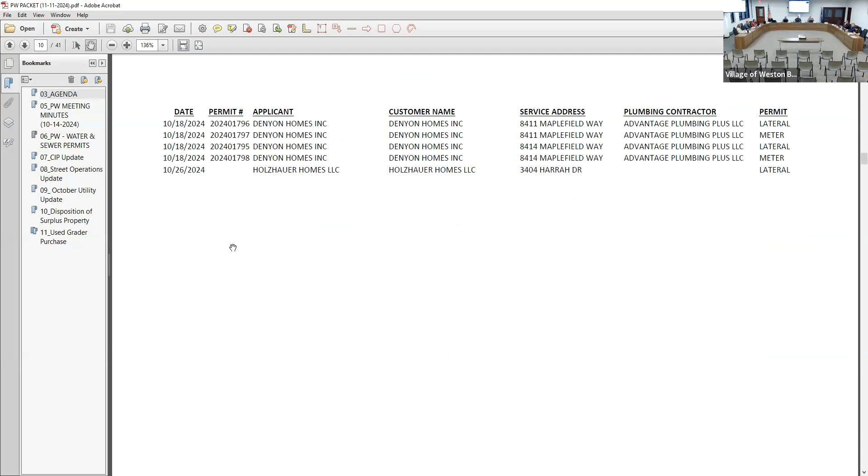Thank you. Item 7, CIP update. Michael?

We do have a new board member with us today too. I think we glossed over that quickly, but we already welcomed him to the board, the big board. Glad to be here. I'm happy he's here, and he wasn't here when I needed him, but that was for both of you. We're gonna be good from here out. Well, welcome to Public Works and Utilities, hopefully enjoy your time here.

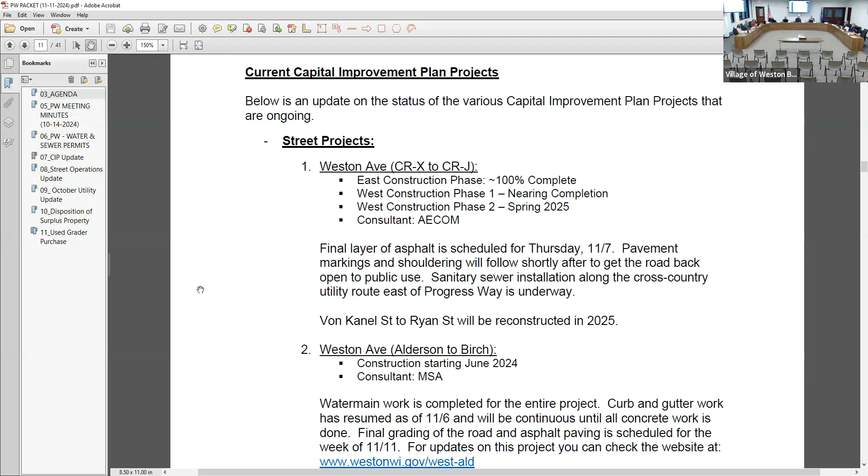As far as our streets, construction luckily a lot of asphalt is gonna be going down this week, so roads should start looking like roads again. On County Highway, or Weston Ave just east of the intersection, the final layer of asphalt was paved last week. Pavement markings and shouldering will happen early this week, and it should hopefully be opened up to traffic by the end of this week. Century Fence is doing the marking, we don't use Marathon County anymore for the contracted projects. Marathon County does the line painting for us as the village as part of our general maintenance, but for larger projects it's up to the contractor to schedule that themselves.

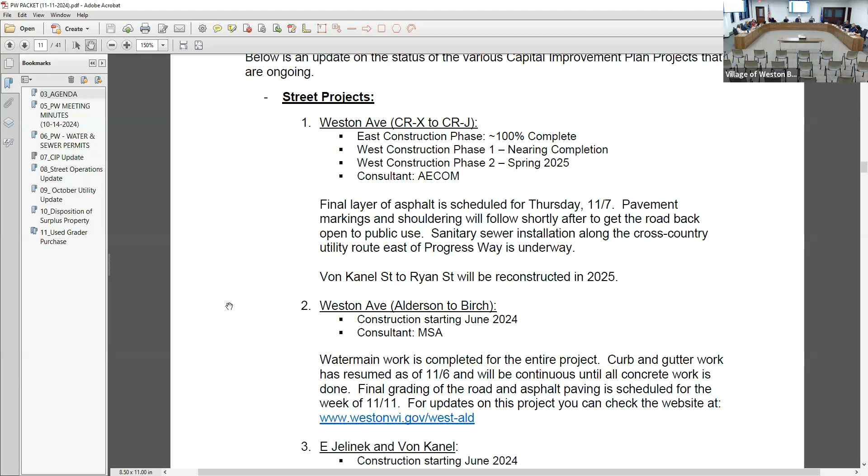So that'll conclude that portion of Weston Ave for this year, and then in the spring Von Kanel to Ryan Street will be underway. Then for Weston Ave between Alderson and Birch Street, the concrete curb and gutter was all finished last week.

Integrity was out doing final grading over the weekend, and paving is scheduled for Wednesday or Thursday this week out there. They'll get binder down on Weston Ave. Their plan, I believe, was to turn around and get surface on the other streets that had binder, and then try to finish up surface on Weston Ave.

That one should be open shortly -- that was my question, when it's gonna be open to traffic. Pavement markings on that one might have to wait until the following week, but we could maybe look at temporary lane delineators just to let it be open, or at least still under a construction zone. And then East Jelinek, if you drove by, got binder down today.

They'll kind of continue that effort throughout the rest of the week. American Asphalt has a fair amount of work to do in the village of Weston, and they'll just be going from one of our projects to another, as long as temperatures stay good, which looks like it'll be okay this week, though it'll get a little close there.

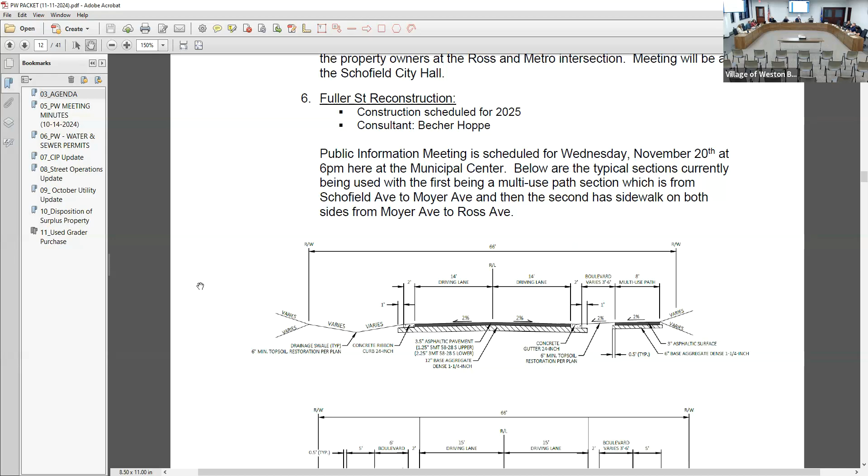And then for Fuller Street, we have a public information meeting scheduled for next week Wednesday here at the Municipal Center. That isn't necessarily something you guys need to attend -- it's not required, but if you want to, you're more than welcome. Essentially, from Moyer Avenue south there'll be a multi-use path on the east side of the road with a ditch on the west side, and then Moyer Avenue up to Ross Avenue would be sidewalk on both sides of the road.

Somewhat similar to Mesker Street, just a few blocks over, but I think the asphalt pavement width is about 2 feet less, while the grass terrace area should be about 2 feet more.

I just have a question on this. I think two meetings ago you said you're going to use the soccer field area for stormwater, and then let them play soccer after the water drains. That's not going to work, because each time you get water in there, there's going to be sediment and fine dust, plus any contaminated pickup like grease or whatever. Those are going to be there, and I don't think they can play.

So there'd still be some pre-treatment, so the hope is to catch a lot of that suspended solids and dust debris prior, and then the pond would be more for the infiltration aspect of it.

Is it even being used anymore for soccer fields? The only organization that uses Kellyland is what Sean refers to as the Home Educators Group, I think it's a homeschool group that uses it in the fall, like one or two days a week. I walk past it a lot and have seen zero people using it all summer. Not one single time have I seen anybody out there playing anything. It doesn't mean I'm walking by there all the time, but yeah, 20 years ago it got used a ton. So it's not a highly reserved field or area.

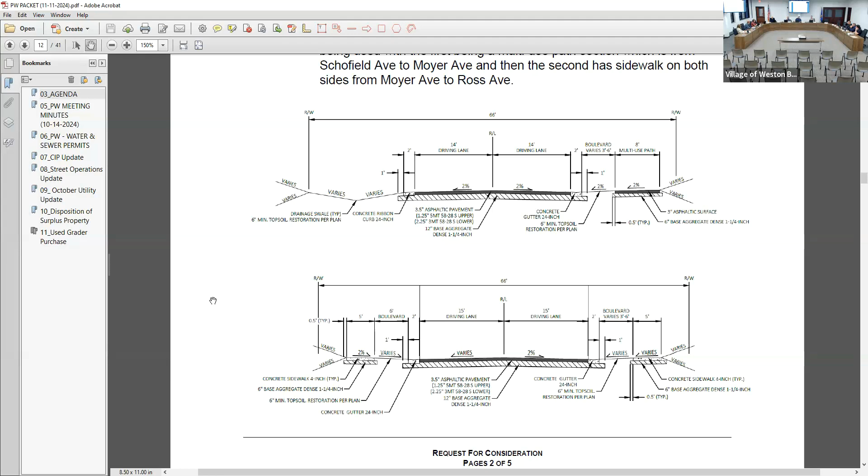I think that was about 4 feet deep, that's what we'd dig out of it to go to the landfill. It does already have that natural depression in it, so.

All right, can we back up for just a second? Ross Avenue, Metro to Pine Street to Alderson Street. Is the city of Schofield doing something west of Metro? They do have another Ross Avenue project, I'm not sure what that all entails. So you're not coordinating with those guys necessarily then?

This one is a joint project with Schofield in that stretch. The north side of Ross Ave is in Schofield and the south side's in Weston. Like Greenheck, the main Greenheck facility there is in Schofield, but their HR building and what used to be the Sugar Shack area, that's Weston.

And then those intersections, like Metro and Pine Street, is a 3/4 Schofield, 1/4 Weston intersection, and Alderson Street is 3/4 Weston, 1/4 Schofield.

So those signs they got in there, did they get approved by the village, or did they not have to? They did get approved, through the Schofield Plan Commission. They knew these projects are in the works, but we're looking at 2027 for construction, so they didn't necessarily want to wait until then to get their signage up.

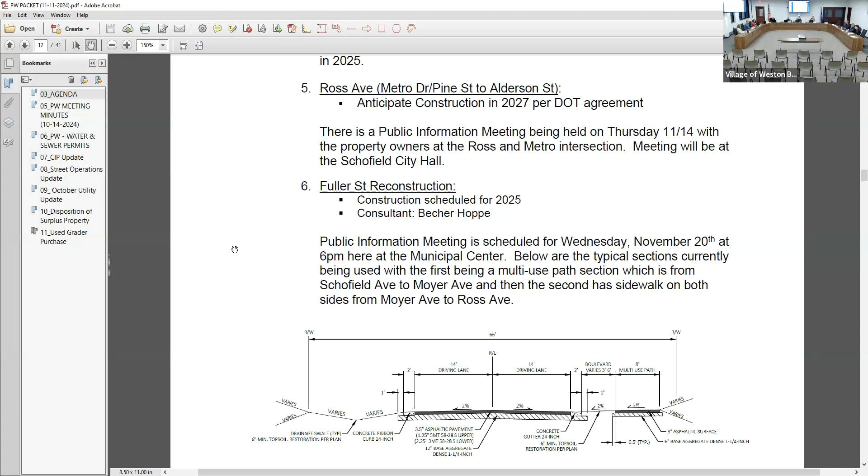That one also has a public information meeting this coming Thursday at the city of Schofield, essentially just looking at that Metro Drive intersection, trying to get a better understanding from those property owners how to best align a roundabout within that corridor. Some options get it really close to a house, some keep it fairly far away, so just trying to understand what is or is not acceptable to those property owners.

And then the other one still under construction right now is the Schofield Ave and Mesker Street project. They worked on some of the concrete pavement repairs last week, and I think all those are done now. Curb and inlet work on the inside islands, as well as getting those bases poured, will happen this week. I think a frontier hole and hand hole still need to be relocated, so the sidewalk work on the north side can get finished up there.

But for the most part, they should be able to get the traffic lanes back up, hopefully by the end of the week for through traffic as it was. And then the signals are still looking like about the second week of December to be getting installed.

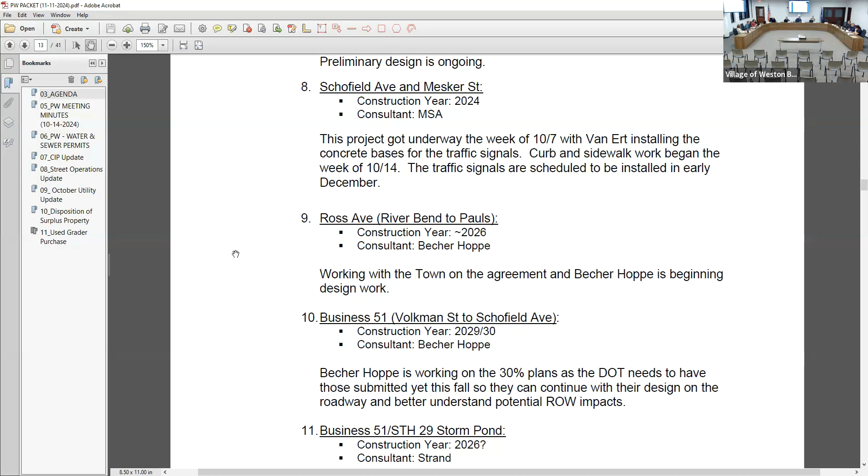Can we go back to Fuller? Sure, in cross section, one of them has a 14 foot driving lane and the other one has 15 feet. Are we putting a bicycle path in there or what?

I guess we'd be making it all 14 feet, looking back at it. These aren't final, these are kind of where we're at right now. Late last week and even today I was going over some of these details with Becher Hoppe a little more diligently.

So we'd try to get a little wider boulevard or terrace area there. One of the complaints we get is, especially come snow season, if you've got sidewalk outside your house, a wider boulevard gives you more room to shovel snow, and you're not fighting all the snow from the street that got plowed onto the sidewalk. The more room we can give people on the boulevard, the better, and it also creates greater separation from the traffic as you're walking.

In a 14-foot lane, you can still get a 10 or 11-foot drive lane and still have a 3 to 4 foot bike lane striped. You do need a bike lane there because it takes a lot of traffic. Yeah, they come off of Ross and turn that way.

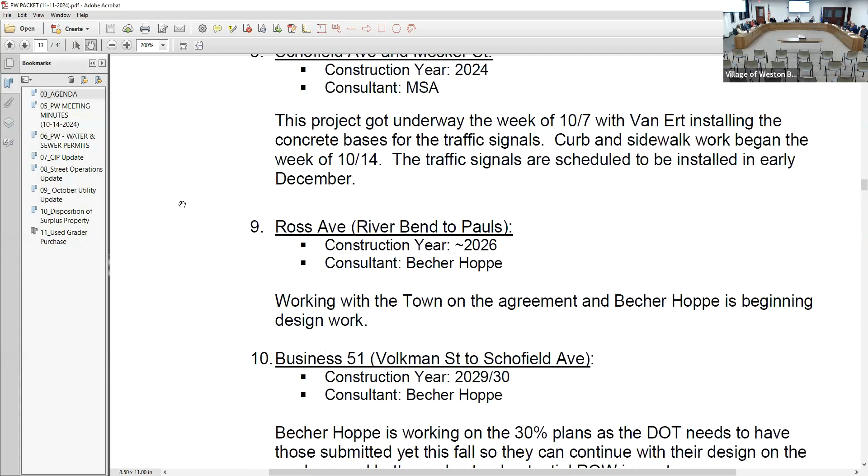So you're going to bring back another cross section. Yeah, that's still, like I said, preliminary design aspect, we're not final yet. All right, I guess that's probably the main items going on at the moment.

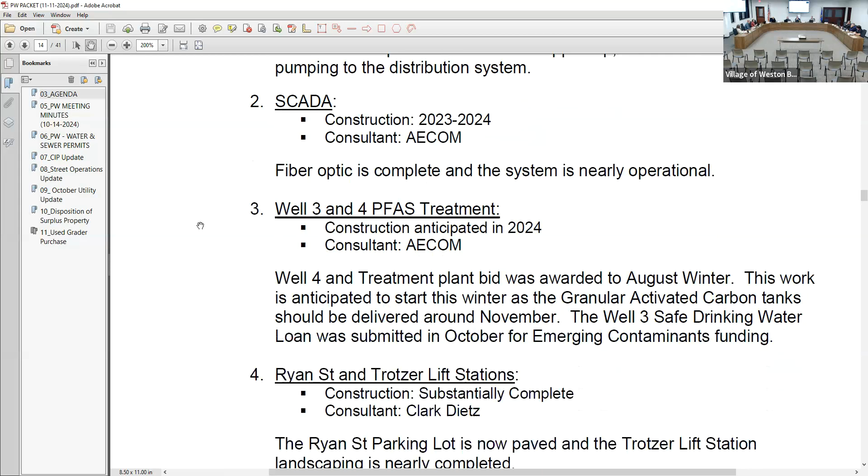And we still have a bunch of other projects in planning and design phase. I can let somebody else talk for a little bit, unless you have questions on anything else we have going on right now.

Maybe sometime we should look at the Alderson and Ross Avenue intersection, by Greenheck and Crystal Finishing. As far as, you want to see the conceptual layout there? Probably. Okay, yep, can do that.

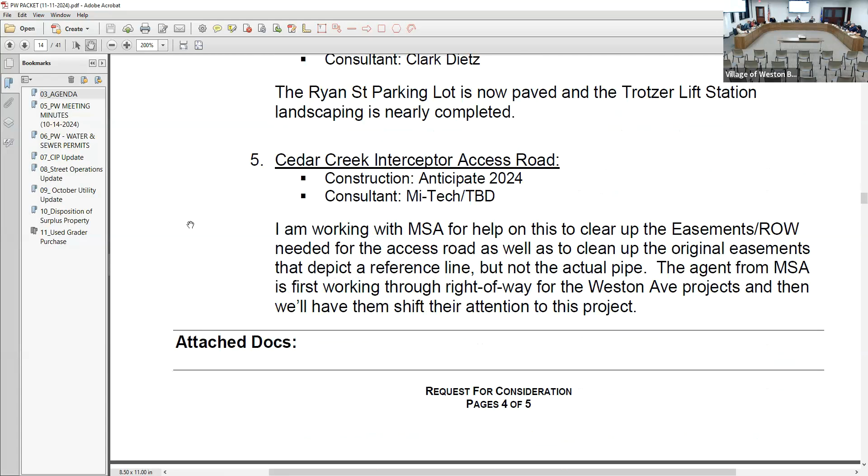That one has a little less... I could even send you guys that, or bring it to the next meeting. For the most part, that property on the southeast, it'll eat into a little bit of that woods, but trying to fit a roundabout in there, the Greenheck building on the northwest corner is kind of a constraint, we can't build into it, so that's kind of the holding grade there. So a lot of the impact at that intersection is on the southeast corner.

Yeah, you've got truck traffic too. Yep. All right, anything else?

Question for Michael, real quick, with the East Jelinek project, is the multi-use path being paved at the same time as the road, or has that kind of been put on the back burner? No, they'll get paved, I think, with the surface layer. Oh, so probably after binder, before final.

Yeah, because they paved the one on Von Kennel north of Jelinek after binder, so yeah. That one's in the mix too, somewhere in that fold of American Asphalt paving something in the village this week and early next week.

Maybe we should look at Ross Avenue, not in the future sometime, and look at the right of way. See if we can solve the issue in there, or solve it because of a Kelly bar. He's sitting on the right of way practically.

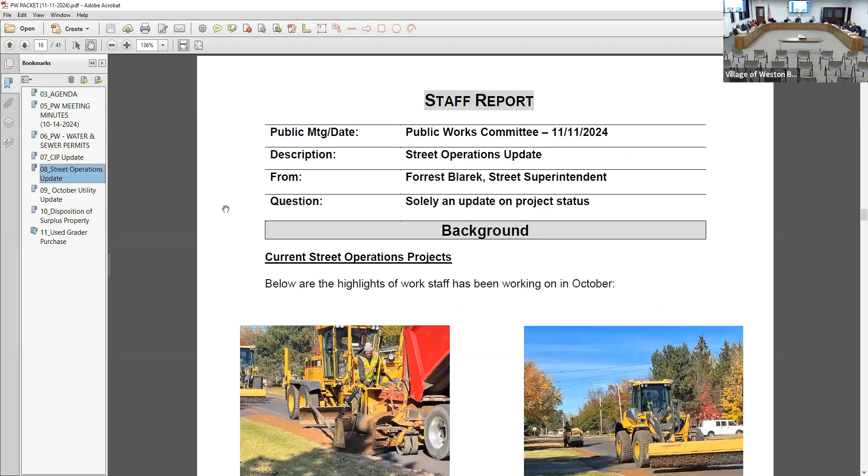Anything else, Michael? Item 8, the street operation update. Yes, as of last month, our shouldering operations got done where we had all the overlays take place.

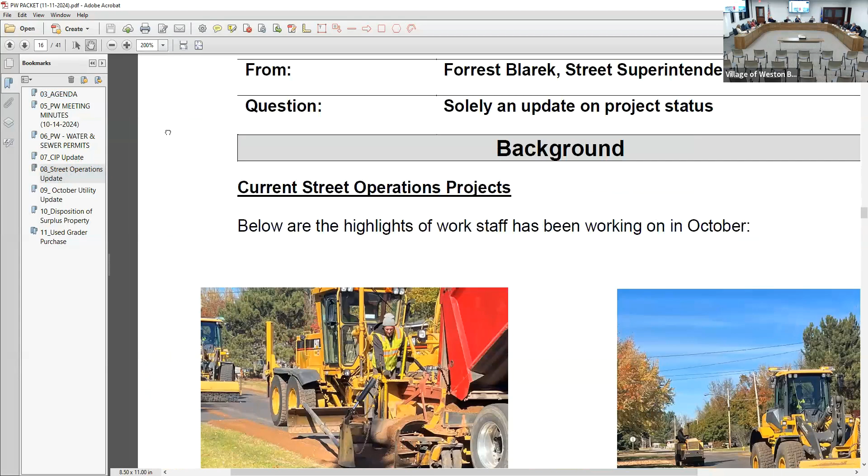Staff performed all the shouldering of the granite, which included the Mallet Court, Chadwick, Colleen, Conless, Parkway, Country Creek, Siberian, Sandy Meadow area. We got that accomplished. We had to wait till a little bit later in the month due to the warm temperatures.

With that being an inch overlay only, we can't twist and turn on it with the heavy equipment, otherwise it mars the blacktop pretty good. So we had to wait for a little bit cooler temperature. That's what took so long to get that done.

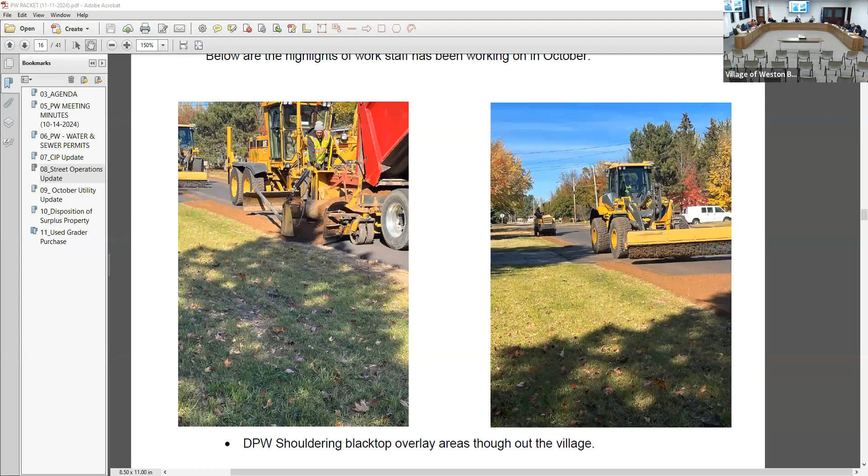Still got the ongoing leaf pickup, leaf brush pickup. We are behind by about 2 days on our vacking of the leaf piles. That has been running a little bit longer on days since we got the rain.

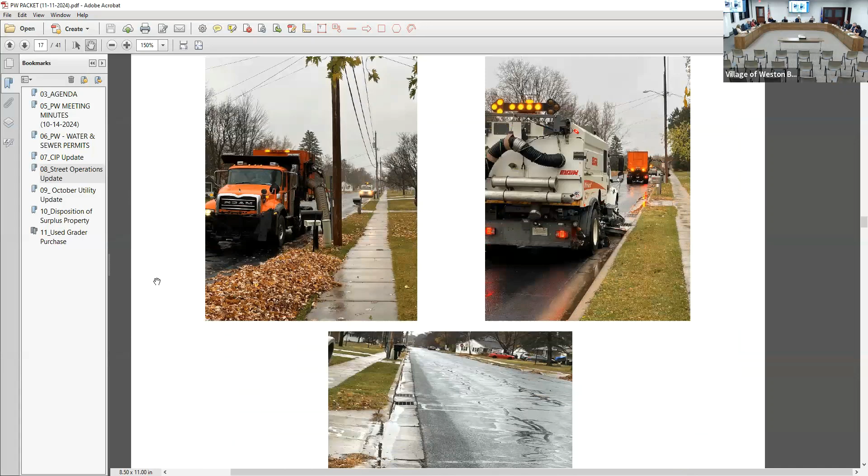They did put in a couple extra hours here and there finishing up the street so they can advance to the next route faster. We're utilizing dump areas such as Kennedy Park and Machmueller for the vacs to dump off so they can get back on route quicker instead of having to run all the way to Ryan Street to dump. They can dump at those sites, which we can clear out on later dates and times.

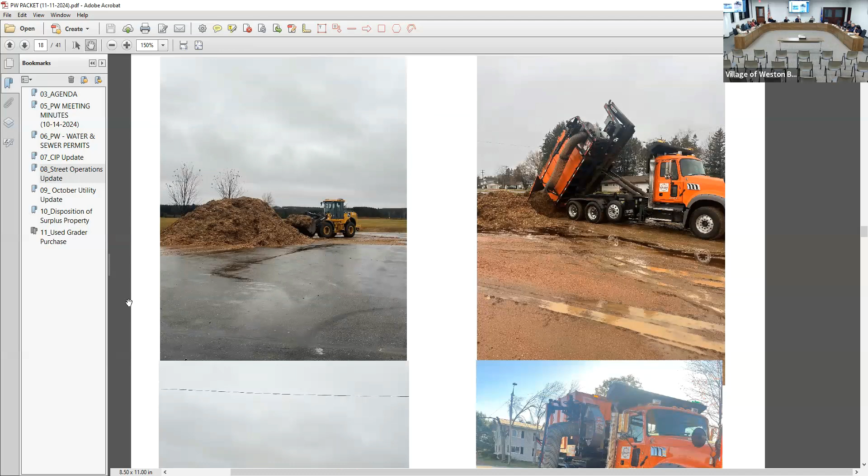The brush goes directly to Ryan Street after being picked, because the brush turnaround isn't as much as the leaf grass pickup. Keep them on the time schedule. Also down at Ryan Street.

They're taking care of the brush and the grass compost down there. We are also taking staff down there about 2 days a week to clean everything up, keep everything organized, sometimes more, especially with the contractors coming in and out, hauling material.

We had an instance with like a dirty blacktop type coming in with sod and dirt mixed in with it. We had to separate it from the pile to be crushed.

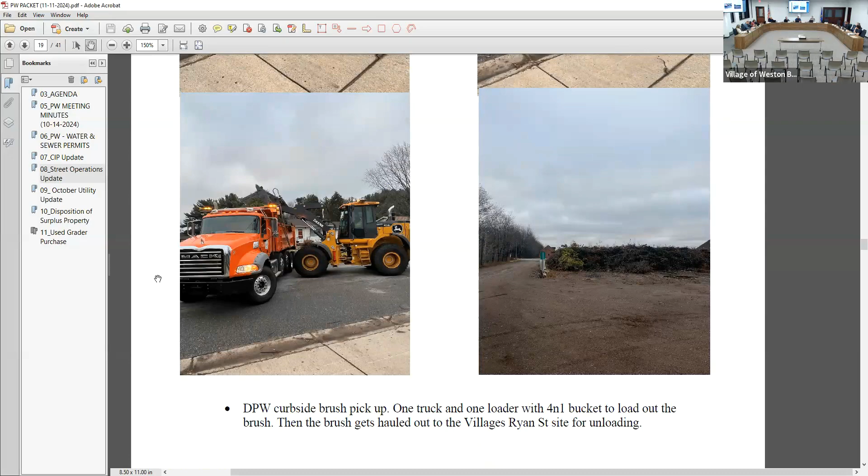We had concrete work around the hospital done that the staff had done. We had inlet failure going on up there, and noticed some cracking of the concrete sidewalk.

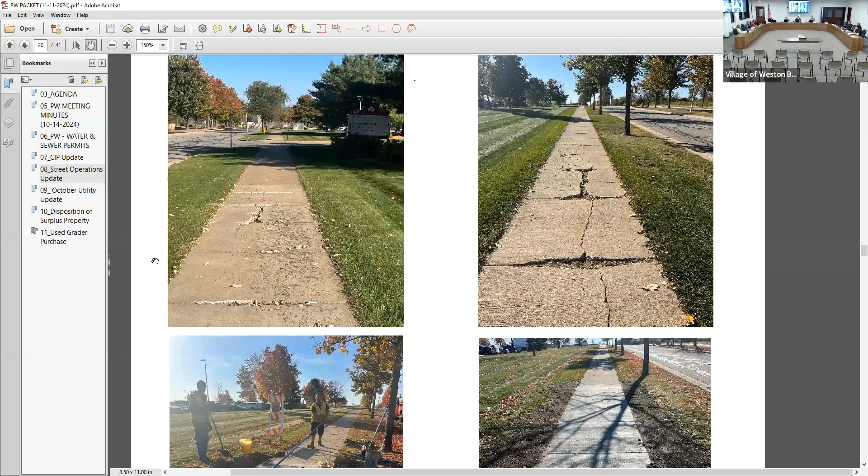To get the 3 yard minimum, you gotta order 3 yards per truck, otherwise you get charged for 3 even if you don't use 3. So we fixed the inlet and did sidewalk repair with that.

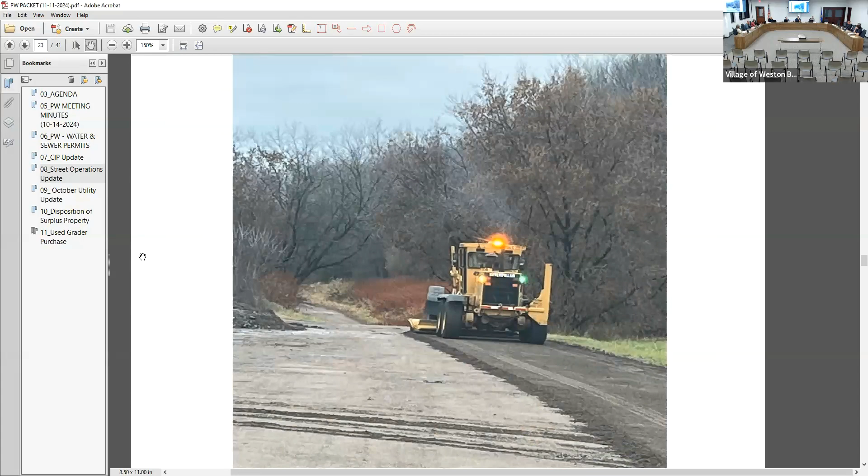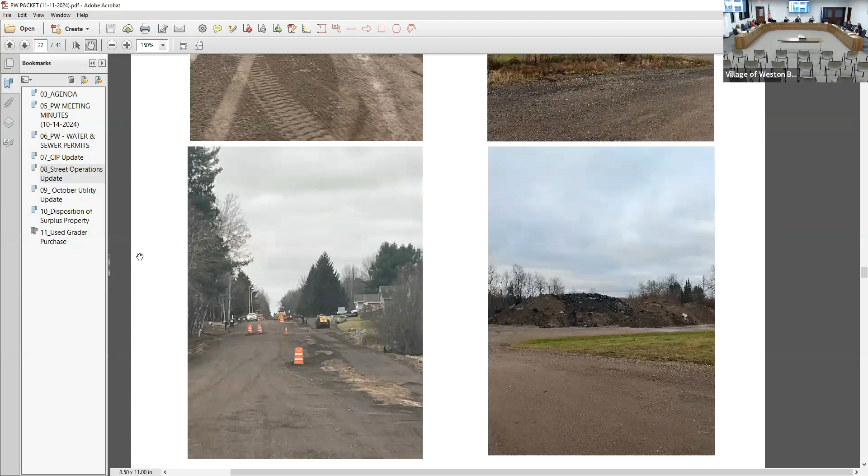Just keeping up so far on the street sweeping, the leaf pickup, grading, before winter hits. We have staff working down at Ryan Street, and we screened 5,000 yards of topsoil for projects for the village, for our staff to use and for the contractors to use, and taking care of compost and asphalt. Just trying to stay ahead of everything like that. So that's what the street staff is up to.

Any question for Forrest? Real quick, so from the city of Wausau, I had heard they had discussed getting rid of leaf pickup because they're not getting the credits for leaf pickup in alleys and stuff. Is there any kind of change or anything that would impact the village for how we do that?

No, there's part of the stormwater credit policy that you can ask for is your leaf pickup. We don't have alleys, I guess, so that never came into any factor. Also, before the stormwater utility existed, leaf pickup has and still is funded through the refuse recycling fund. So it's not even necessarily a stormwater funded item, it's a refuse funded item because of the reuse of the leaves for compost and that aspect.

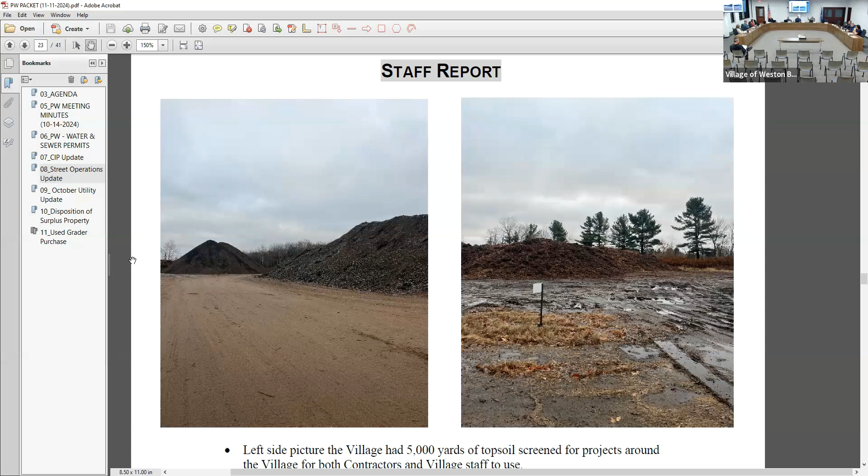That's on East. Oh, the grader. That one was on Ryan Street, our dump site. To the left would be the dump site. So this grader is up by the yards, near the parking lot, as you drive in, inside the property. Just off the screen would be the large asphalt pile, like crushed asphalt.

Well, 7 and 8, is that still the same ongoing issue? I think we finally got that resolved Friday, or Thursday. Okay, yeah, it is for final.

There's a few tiny loose ends, not hairs, that I think finally got resolved. I just saw in here that it was still showing 98%. Yeah, I just kind of left that number there, but it is complete. It is working.

There's an item with the generator that we wanted to get fixed by somebody. That's the hard part with a lot of this stuff. We told our staff, go do it, we could do it, right? And it'd take all of 20 minutes, but we want to make sure it's documented so that if it does break, it's covered under a warranty item, and it's not a case of 'well, you guys touched it, so it's not our issue anymore.'

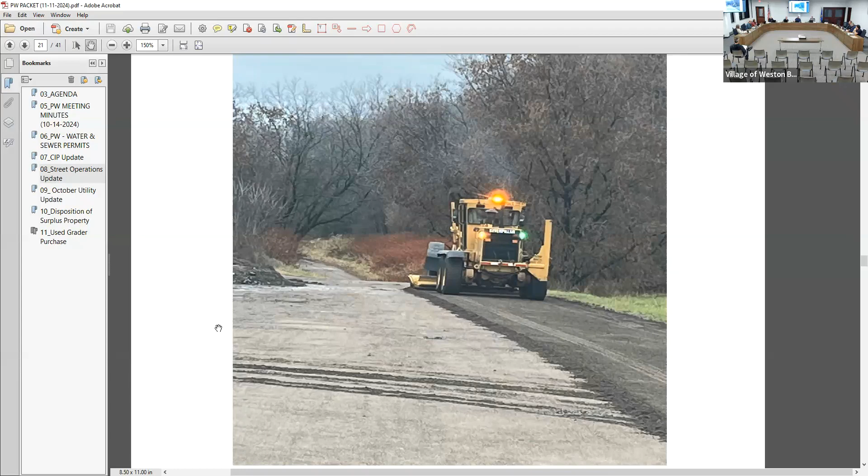Okay, item 9, utility operation update, Josh? Yeah, I was feeling inspired by the Forest Report to start adding some pictures myself. Unfortunately, I put a filter on there where you can't hardly make anything out. It was very dirty, still looks dirty, but anyway, I started adding some photos, thought it was a good touch.

Our Well 2 carrier well rehab was completed last month. Just a couple of miscellaneous well items: a caustic leak, and we did get the air stripper filter and belts cleaned and replaced.

We started pumping out our non-draining hydrants in preparation for the cold temps. Usually we hit about 6 to 8 of our old two-nozzle hydrants, so we did prep and completed 5 retrofit hydrants. That's a couple of the other pictures there.

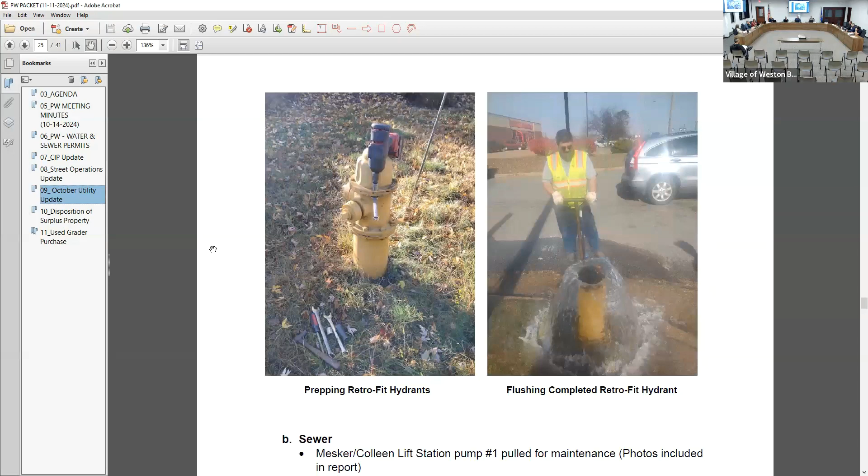We worked with Schofield to exercise some of our interconnect valves. Completed DNR quarterly compliance sampling, completed our EPA PFAS sampling, which we're switching to monthly collection for until Well 4 is down, when we start getting our permanent PFAS treatment system going over there.

And as Michael touched on, we have a number of road projects, so we were lending a hand, looking into valves and getting stuff shut off and opened up. Luckily, a lot of that's coming to an end.

We wrapped up our DNR community service line material inventory. I need to jump on there and review how it looks on the website. We've got to find the best way to get it out to customers so they can take a peek at what their service lines are. It'll be a nice way, as we keep doing inspections, to update things—we have records, but some are old. There's a question of whether it's known or unknown. We have a record, so it seems known, but it might have changed since 1981 when we got the record. So it'll be a living, breathing thing as we continue on.

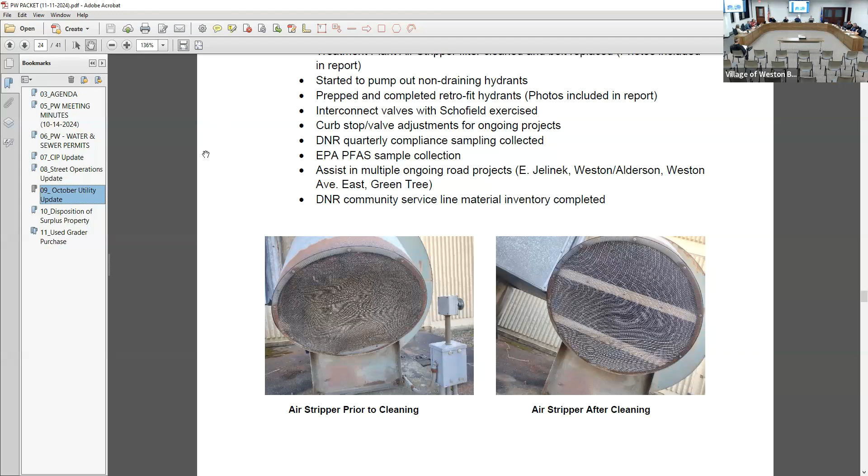On the sewer side of things, we had a Mesker/Colleen pump pulled, a few of the pictures there on the next page. That was actually put back in today.

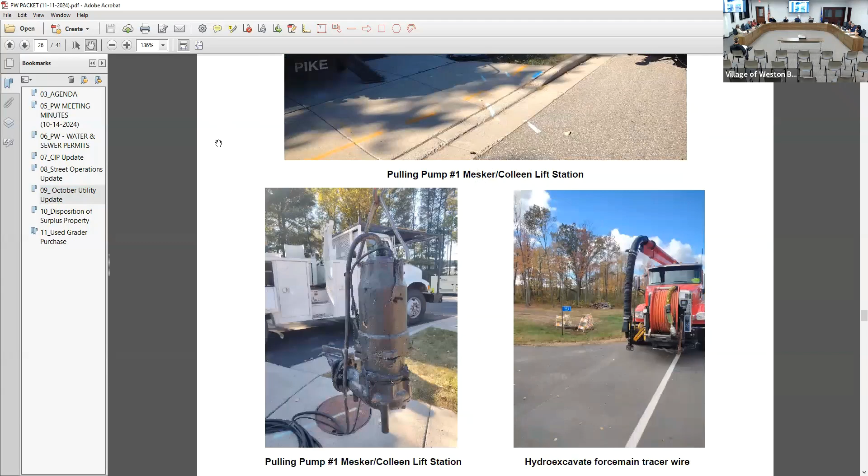What was wrong with it? There was something with the motor in there and a seal failure. Initially it went in for a seal fail, but I think they found something with the motor, so it took a little bit extra time to get done. I could probably have Dave speak on it more—he's the one who pulls it and brings it in—but yeah, there was an issue with the motor, though initially it was kind of a seal fail.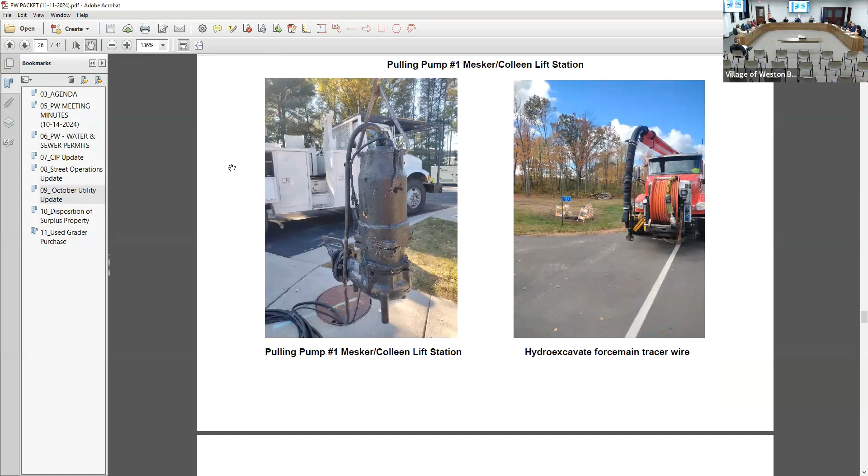Our sanitary sewer jetting was completed. After we finished that, we got to some of our bad spots, which have poor flow lines. We need to get in and readdress some of those flow lines so we don't keep having bad spots.

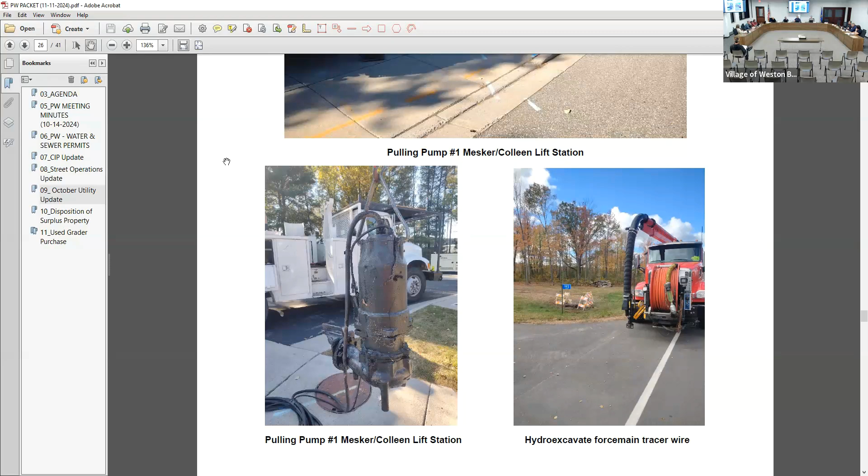After our bad spots were done, our guys jumped onto lift station cleaning. I think they have basically all of them done. We're just waiting for the time to get to our Mesker/Colleen lift station. That's one where we need to turn off a few upstream lift stations so we have enough time to pump that one down, because it takes in a massive amount of waste from the village. So the guys usually come in, last year they came in 3:30, 4 a.m., positioned at different stations, shut it down, give it some time, suck it down, clean the bottom, turn everything back on so we don't have any overflows.

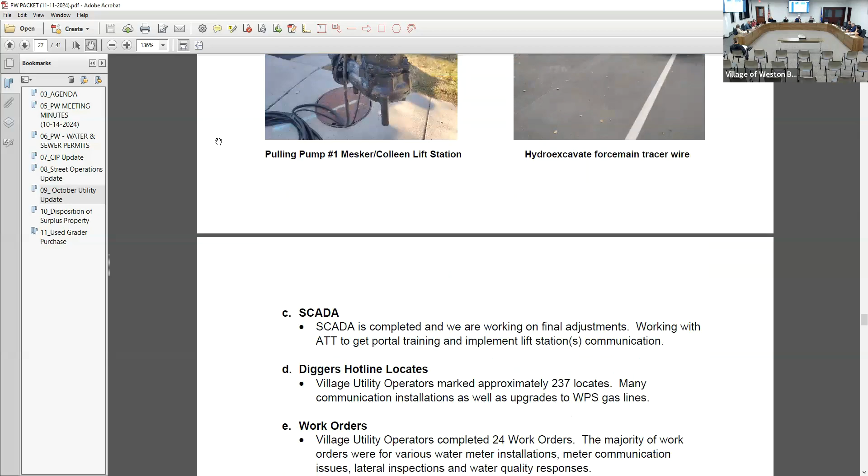On that, we cleaned and collected pH data at some of our locations where we have them set, and performed some of our generator maintenance items. With all the vac truck use, we had a few issues with it. We had to have a pressure switch put in place temporarily while we waited for a replacement part. The jetter hose also had to be repaired.

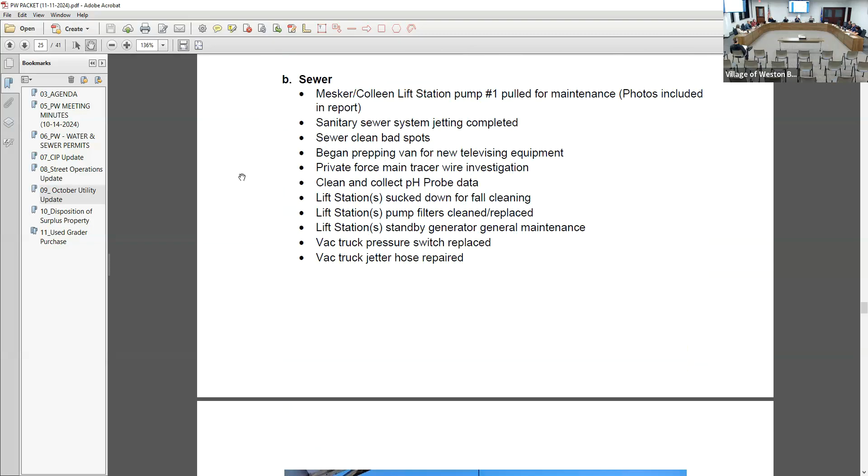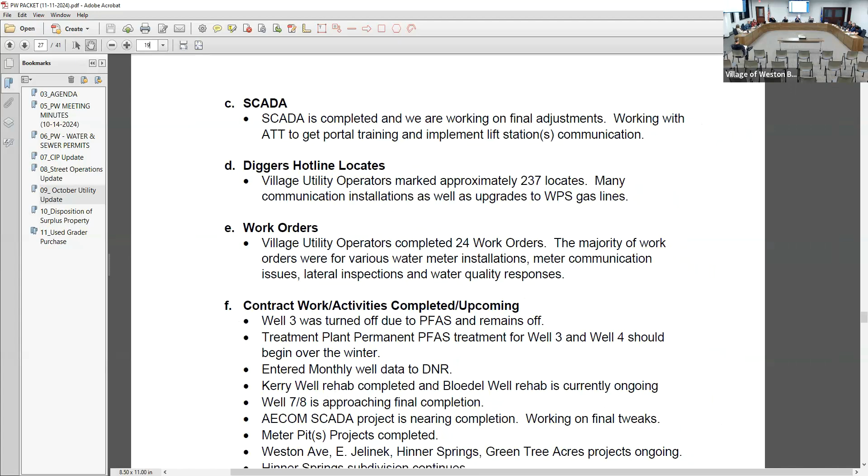We are close, I think, on our SCADA project with AT&T. Yet again, had a little snafu in their back end. AT&T found they had an incorrect APN, or something where they were building a network that wasn't going to be suitable for what we needed. They thought they discovered that 2 months ago when they said they had an incorrect APN, and now they found somebody else who's incorrect. So I was talking with PJ Cortons, who's helping us on the back end of our SCADA system. They're working on it. It should be close, so hopefully once that's done, we'll have all our lift stations on our new SCADA.

I think they needed a new PC at the treatment plant to handle things, because we have too much coming in now and the old computer can't handle everything that we have communicating with it.

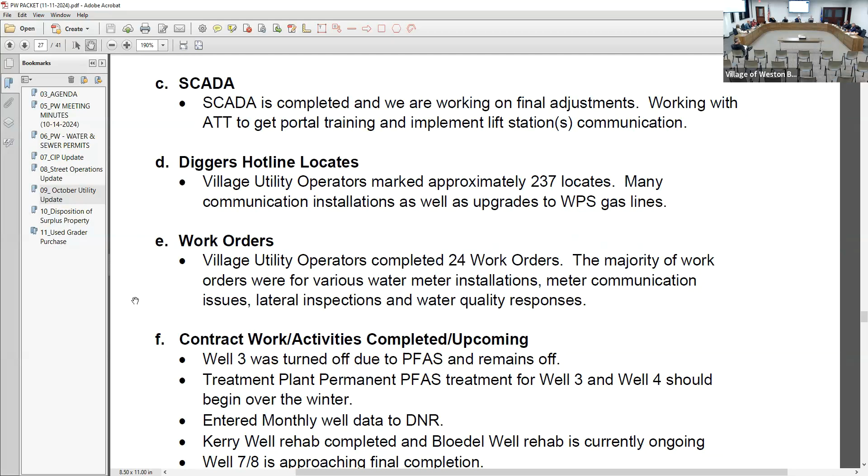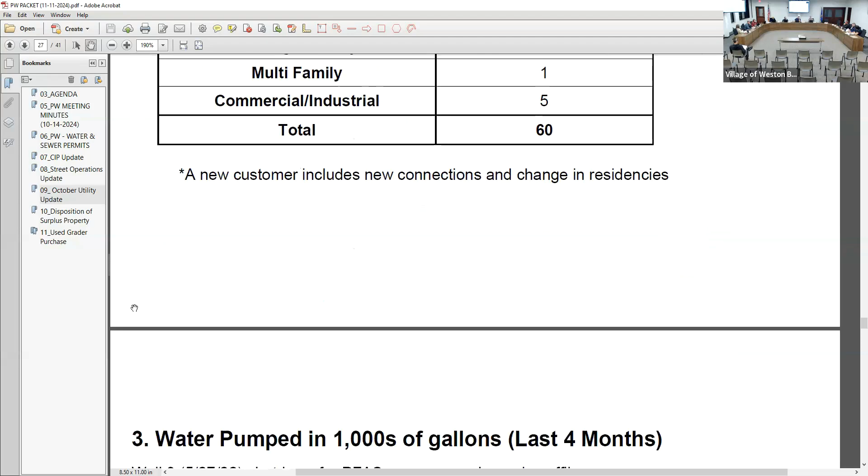We also had a number of utility locates, work orders, and contract work that Michael mostly touched on. Our Bloedel well rehab is ongoing currently, and everything else has been touched on. Then we just have our numbers of stuff our customers added, what our wells put out over the last few months, and what our lift station flows and hours were as well.

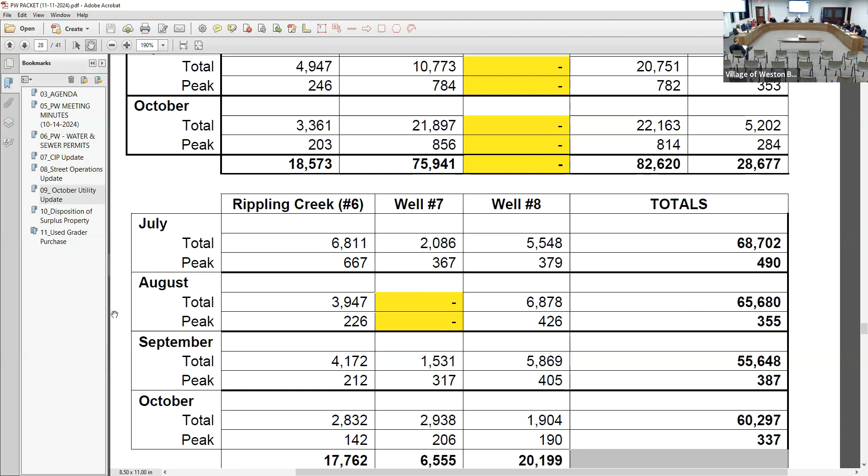Not for me. I was just going to add the service line inventory requirement, where Josh had to go through every single service lateral in the village of Weston, in the Weston utility, so that was a little over 6,000. It was a lot, making sure we have those documented and the material type and size. So luckily for us, we don't have lead services. This was put together by the DNR, so communities that had a lot of lead service lines start having a database where when they get one replaced, they can check it off their list that they know it's now not lead.

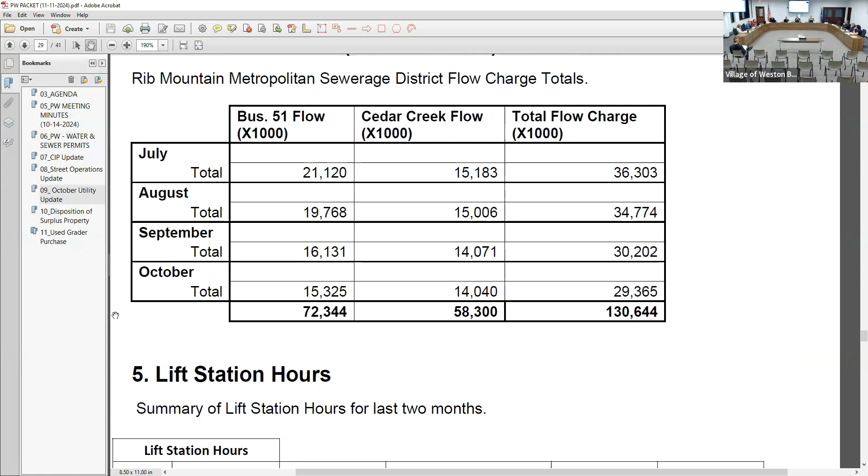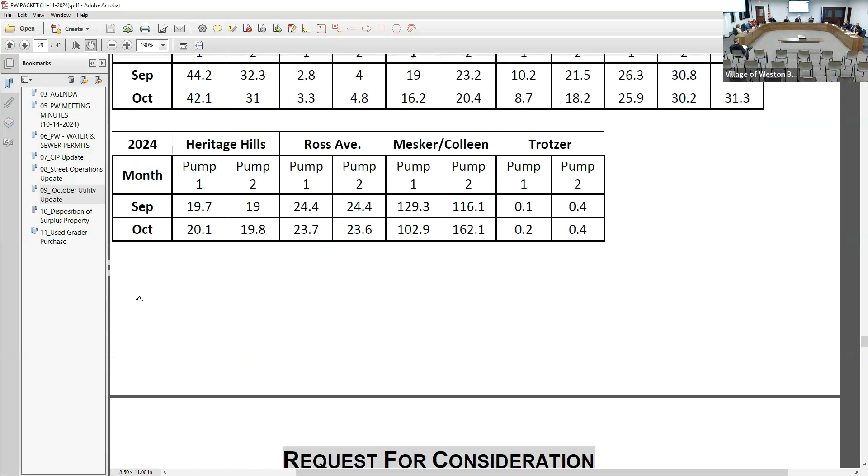So do we have still lead pipe? We don't have any lead pipe, no. Luckily for us, it was just an exercise of identifying all of our material types, but I couldn't imagine if we had a ton of lead services, that would have been rough. It still took 2 years to put it together. Still, with all this work we do, the water quality is not there. We've been trying. Customers are complaining about the taste of the water and iron and manganese, especially the businesses. Because some of them, especially restaurants, when the boiler goes out, that's a big expense for them. When the water heater goes out, that's a big expense for them. So I know Basil, when his water heater went out, he replaced it 3 times.

So, yeah, that's all items that are in the works, like our Mesker well was, I guess, the dirtiest well we had. It's been off now for 2 years, and when it comes back online, it will have iron manganese removal and PFAS removal with it. Wells 7 and 8 have essentially 0 iron manganese in them. Well 6 has been running still well with no iron manganese.

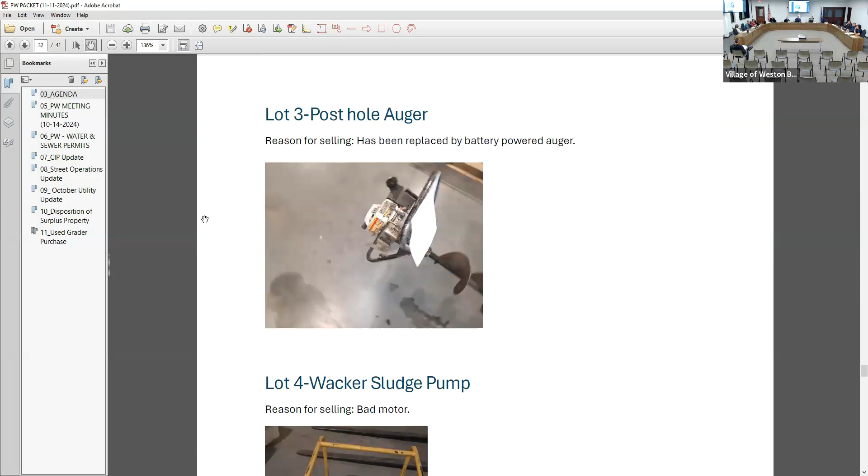Attached is a list of auction items, pieces of equipment we've deemed no longer necessary to keep. For the most part, the vehicle was either replaced with a new one, or a part is obsolete, or it might be broken. It's not worth it to us to keep the broken pieces, but somebody else out there might want it and be able to reuse it.

They look pretty good in the picture, especially that truck. Yeah, the guys do a good job of washing and cleaning. Usually the body work looks pretty good. Is it lipstick on the pig or something? Kind of, yeah.

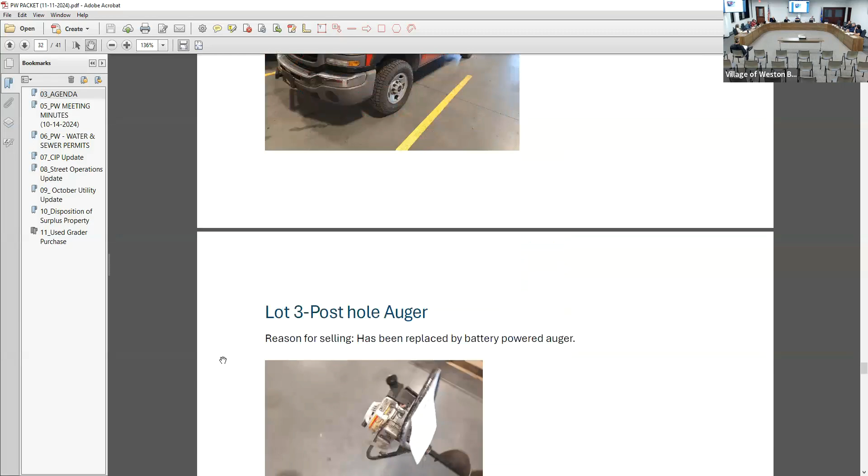That also allows us to get, what, 30 years out of a dump truck? Yeah, you said how many miles on it? I don't know if we have that for the dump truck, but I know I put hours on the grader for the next item. That's usually hours, not miles. Yeah.

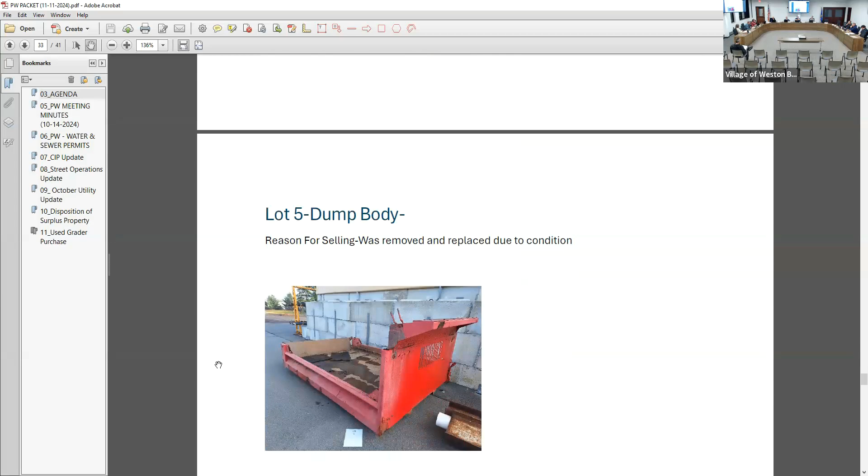Spend a lot more time idling, run. Correct, yeah.

So unless you have any questions, I guess we'd just be looking for endorsement to declare this property as surplus and put it up for auction.

They're ready, all of them? Correct, yeah, pretty much. And then where do you get your costs, how much are they worth? It will go to auction, and then whatever it bids is what we get for it, but...

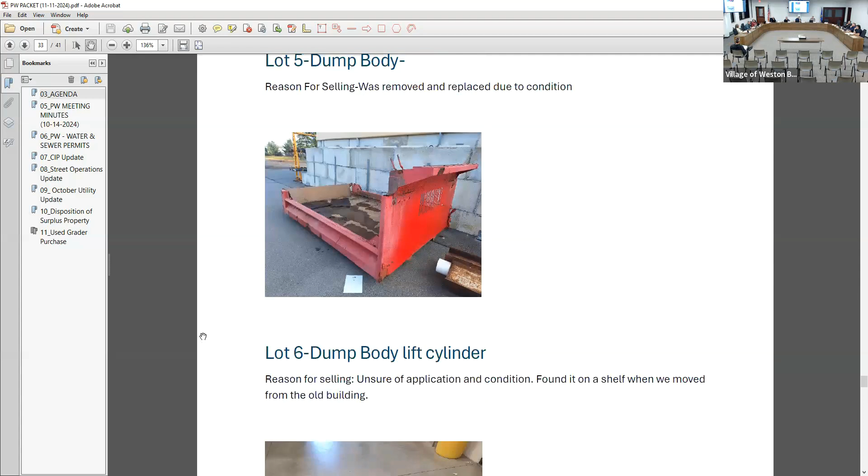I couldn't even guess what a lot of that stuff is worth, to be honest. We can put a reserve on some of the trucks, but historically we've always gotten at least what we thought it was worth, generally more.

That auction site gets a pretty good amount of traffic. Yeah, yeah, for sure.

What's your wishes? I'll move to declare the attached property surplus and authorize disposal. I'll second. Discussion? All in favor, signify by saying aye. Aye. Opposed? Ayes have it, thank you.

Item 11, purchase of replacement grader.

As part of our capital plan that we talked about recently here at the end of summer, early fall, there was an allocation of $400,000 for public works equipment for this 2025 year.

The main item we were looking to replace is a 2001 Cat grader. It's got 8,300 hours, which, to Roy's point, would be roughly 400,000 miles if it was an over-the-road type truck that was driving.

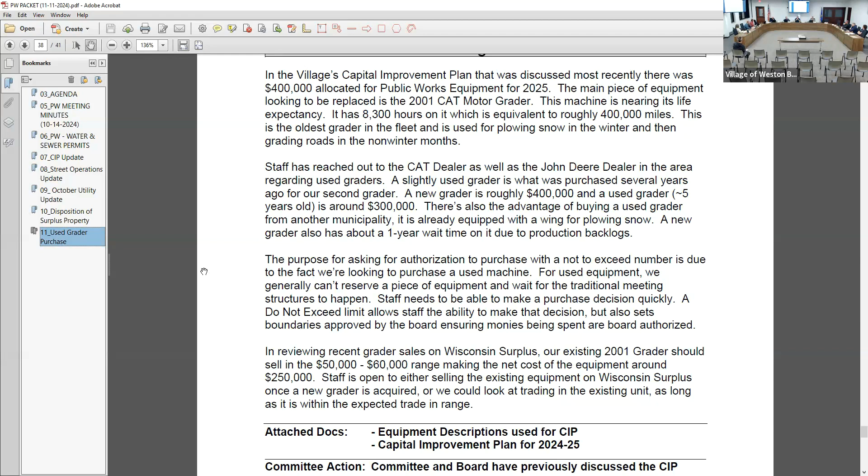Any questions for Michael? Did they give you a trade-in value? I guess we haven't necessarily gotten to that point.

I guess we want to make sure we're good to go forward, because once we say we want to buy it—I know they get equipment in periodically, but with used equipment, the first person who says 'I want it' gets it.

So before they go through the hassle, that's where the ballpark figure comes from—looking at it, it's probably in this range. I'm just assuming it would be less than what you're expecting to sell it for.

Yeah, probably. I didn't see that in your... or we could choose to keep it and sell it ourselves, still buy the new one, and then auction off ours once we have the other one here.

Yeah, we don't have to trade it in, correct? Correct, yeah, we can buy anything outright.

Is it worth it to keep it, or is it going to be more expensive to repair it? It's not worth it for us to keep it. Possibly if we think we'd get more selling it ourselves, yeah. But if we get another grader, it's not worth keeping the one we have. Okay.

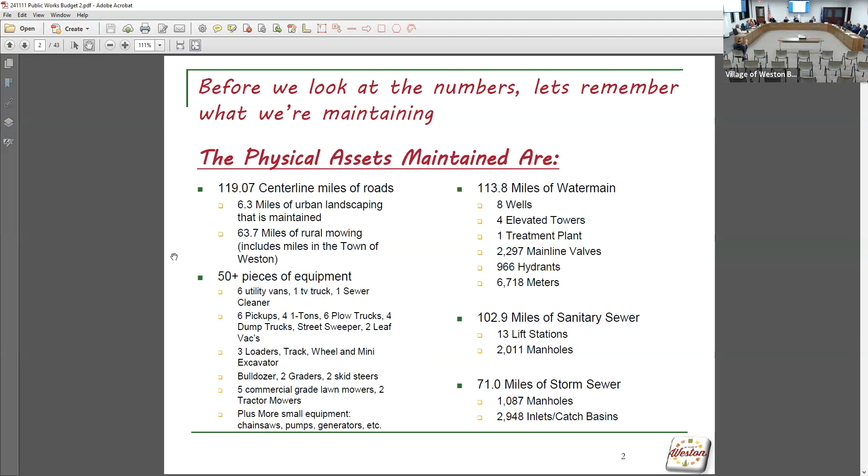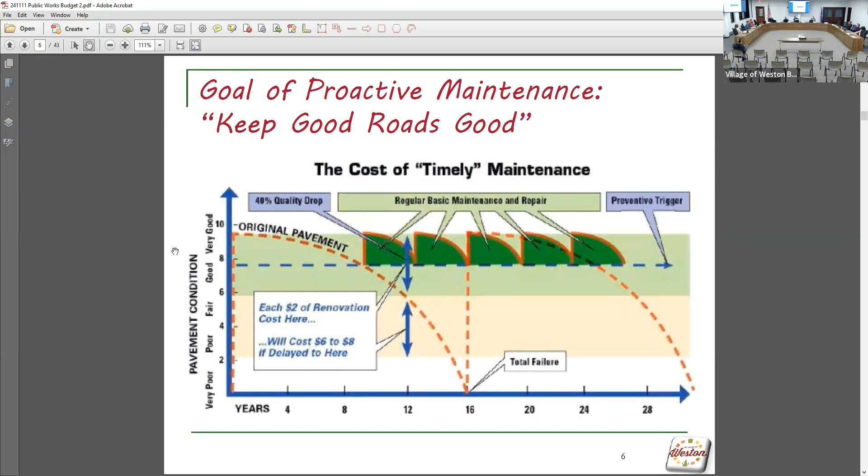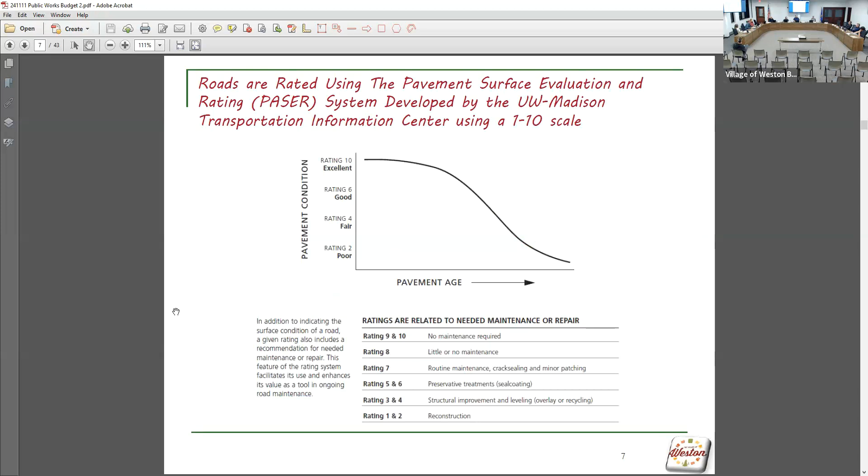We've talked about keeping good roads good, right, the proactive maintenance. So we rate our streets every 2 years on a 1 to 10 scale using PASER. It's every odd year, so 2023 is the last rating year we had. A 10 is a brand new road, a 1 is a failing road. This is our PASER ratings by percentage of miles.

Some of that was inevitable. We had a large portion of the village built in the early 2000s, so a lot of brand new roads from 1998 to 2005, whether the business park, the Sandy Meadow subdivision - about 50% of our street miles were brand new or rebuilt within about a 5 to 10 year window. So we knew the challenge was always going to be how do we keep those good roads in good condition and not let this start sliding the wrong way.

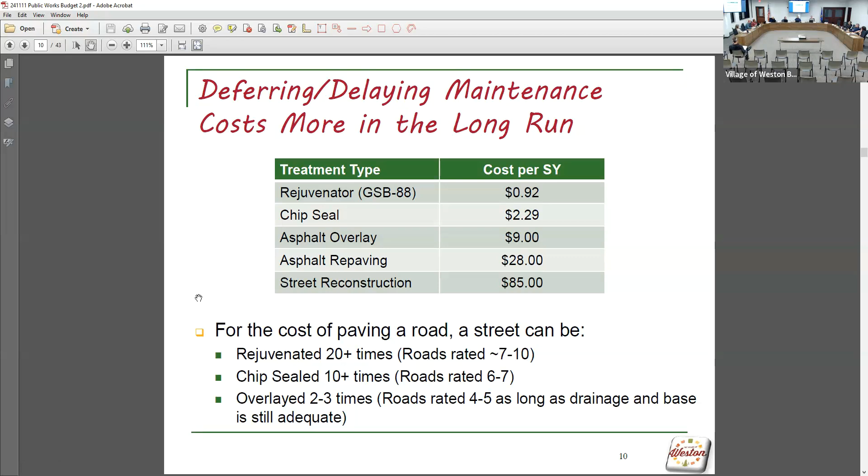We started keeping track of our streets back in 2009. Costs have definitely increased over the years. It's almost twice as much now to chip seal than it did back in 2009. So making sure our budgets catch up and stay with us as we move on is important if we want to keep treating the number of miles, and we keep getting more miles of street. Every time there's a new subdivision or development, that's more miles of roadway we need to now plow and crack seal and rejuvenate in the future.

So in 2024, we got about 12.6% of all the streets in the village treated. Historically, our 5-year average is 8.3%, so about 9, just under 10 miles a year. This year we were just under 15 miles. So that was a good chunk.

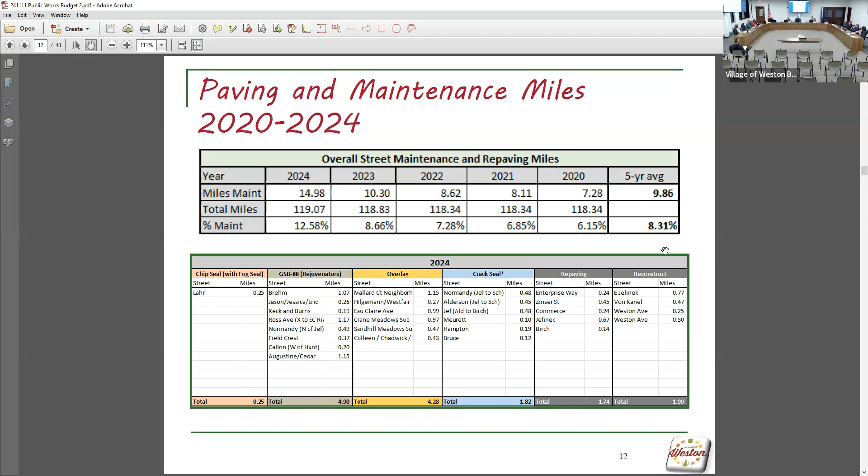It was a lot. Our repaving, our reconstruction was almost 4 miles between the two of those. A lot of that was TIF funded and some of our grant projects. So we know that's not going to happen every year, but being able to get those chunks improved, I think it helps us in the long term.

So again, we try to maintain our thoroughfare. Ross Avenue, we rejuvenated this year, we crack sealed it. It was repaved 2 years ago, 3 years ago. So we want to make sure we stay on those items.

Like the Sandhill Meadows subdivision down in the southwestern portion of the village. Those were new roads, a developer project in 1996, 1997. So we got about 30 years there, 25, 30 years out of those roads. And then now we overlaid them, so we should be able to get another 10, 15 years of that overlay.

So try to make sure we keep maintaining these streets and hopefully are doing the right thing and stretching our dollar as far as we can.

Our work in 2025, again, our overlays are kind of focused on some of this stuff up in Sandy Meadows. That was a late 90s, early 2000s era where sewer and water got extended and then a subdivision was built.

Schofield Avenue was a major project, we got a grant for that back in 2011. The road got rebuilt. This is the second time we're putting a GSB treatment on it. It's still in good shape and we want to keep it looking pretty good for the next 10, 15, 20 years before we have to worry about it.

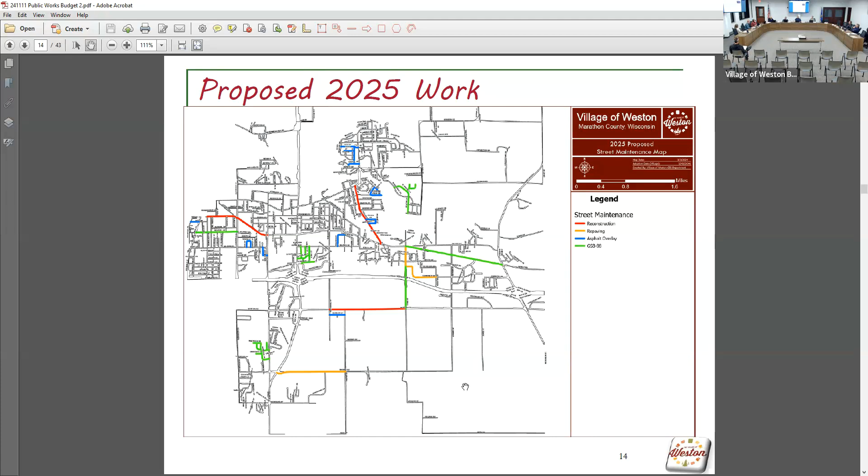So in 2025, we're still about $400,000 less in transportation aids than we were in 2011. We're making some headway to get back to where we were, but it was a stress on the system for a while, trying to figure out how do we keep maintaining these streets without having to really get too creative.

What's that a function of? Is it of the state's budget? Is it a function of how much we have just happened to apply for or what they approved?

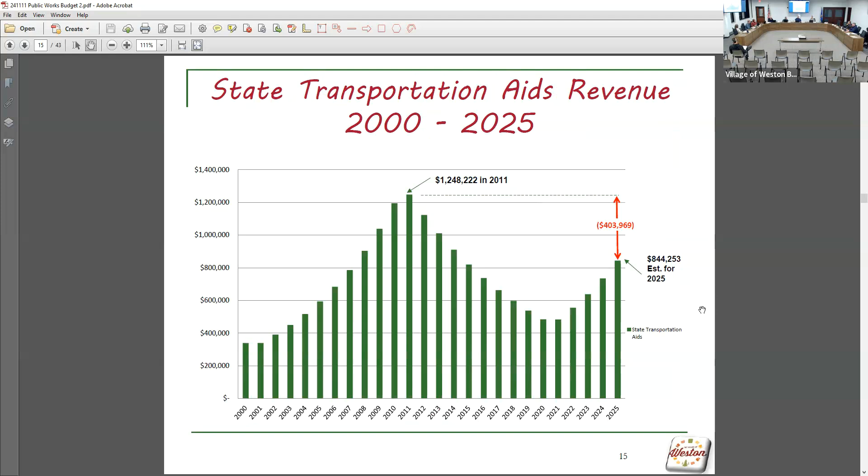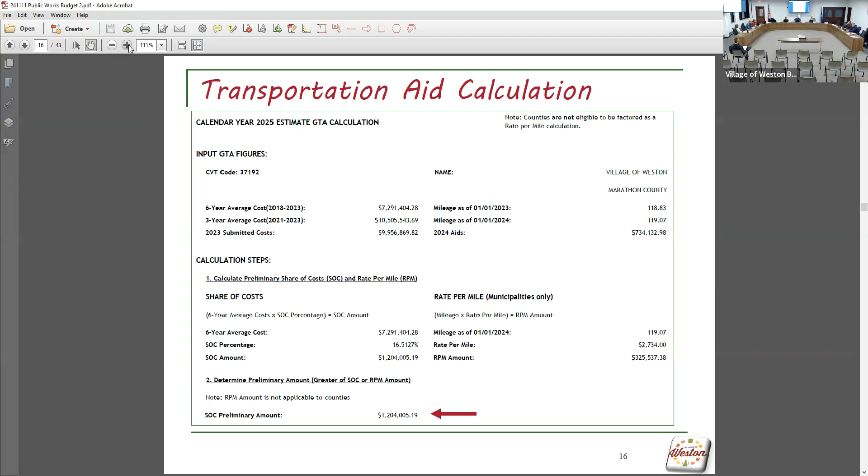Our transportation aid numbers are calculated on a 6-year cost. You average your prior 6 years of construction cost. You can get it per mile, but our per mile aid would be less than our actual cost. This was actually our 2025 estimate. Our 6-year average cost right now is about 7.29 million. Our 2023 costs were 9.9 million. If we went strictly off of the DOT formula, we'd be getting 1.2 million this year in transportation aids.

However, there's also minimum and maximum adjustments. So we can only get 115% of our previous year's aid, whereas inversely your minimum can only be 90% of your previous year. So as we were dropping, it was only a 10% reduction. So to a certain extent we took advantage of this on the minimum side, because otherwise we would have been even lower than what we were. But now that we're heading back uphill, this year we're missing out on about 360,000 extra that the formula says we should get, but we hit our cap, so we're missing out on that gap.

Do we look at that impact as we're looking at what projects and how much to fund when we pay for them? Yeah, so that's a big part of the lesson learned, I guess, is the staff who came in then, we were on the downward swing. It was, why is this happening? How do we address this? And what can we do in the future so we don't see this roller coaster effect?

Really a part of it is getting to a sustainable number that we shoot for, that we're trying to spend each year so that we keep that as a little flutter, not a spike. So we're probably somewhere in that $8 to $9 million range, as we look at what our operating budget is and our general capital costs are, that's probably about where we would be on a yearly average, even if it was slightly less. But I do have this projected out. I could tell you in 2034 what I think we'd be getting for transportation aids.

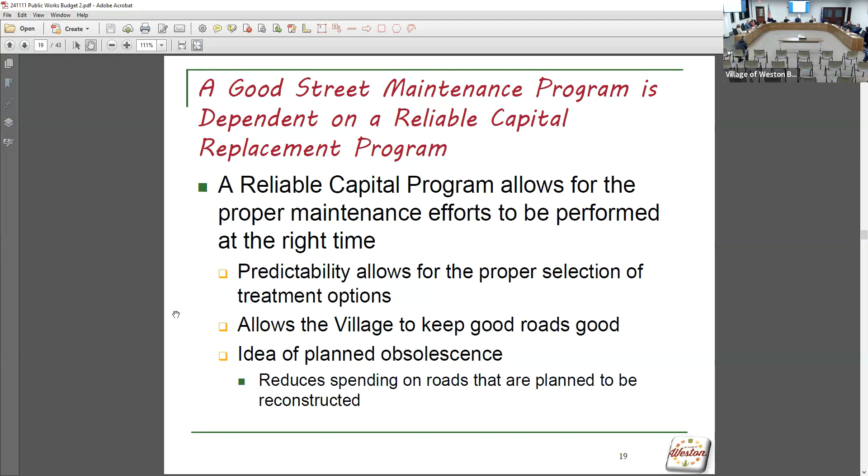So yeah. I'll try to get through this here quickly.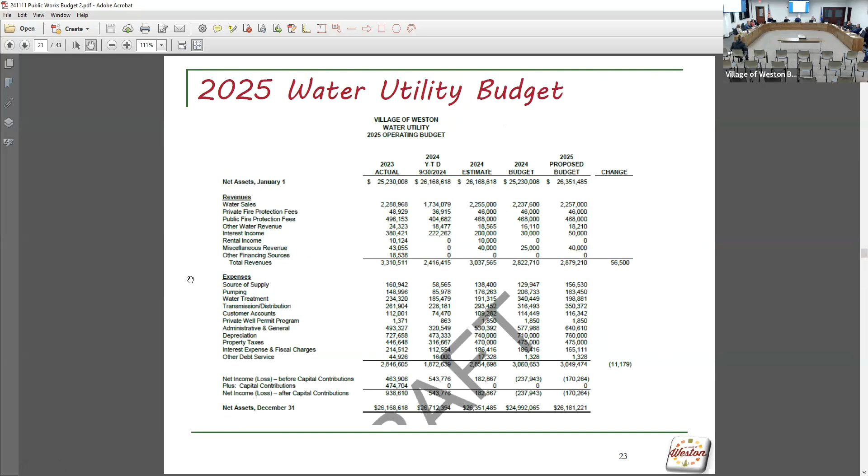Our water utility budget, similar, you see this in the budget book. More or less, budget this coming year is the same as previous years. We have some decreases in expected chemical costs just from having wells 7 and 8 running. We don't feed phosphate, we don't have pH balance or any other issues there. That's a pretty bare bones treatment facility at that well house right now.

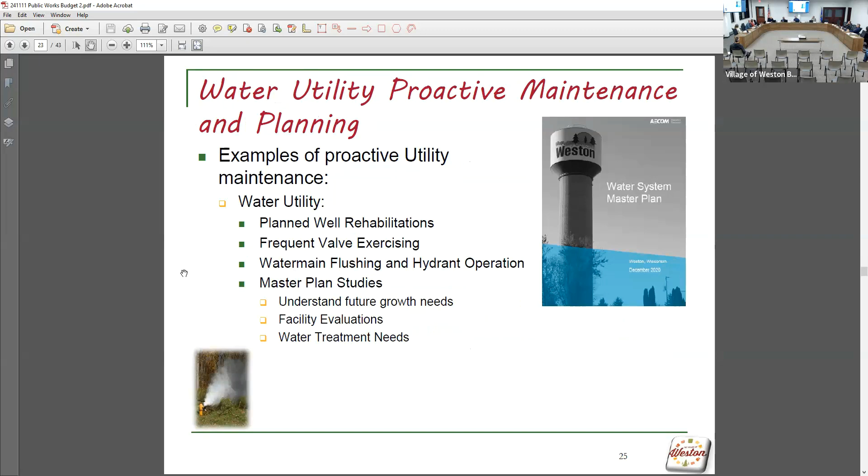Several years ago, we did a master plan where we looked at what we should be doing to make sure we're adequately running our water utility system. Really it was looking at capacity, reliability, and our water quality. With PFAS hits, we turned off our wells.

We didn't have 7 and 8 up and running yet, so we weren't able to flush our mains for, I think, 2 years. That was probably the biggest hurdle we had to face - not being able to get the iron and manganese flushed out of the lines. At that time, Bloedel and Alta Verde, our 2 worst wells, were kind of our main workhorses. That was an issue for water quality, but we didn't have another option at the time. So getting those wells, getting 7 and 8 up and running, getting 1 and 5 a reduced runtime, is really the goal here moving forward, and then getting the iron removal plants created for those.

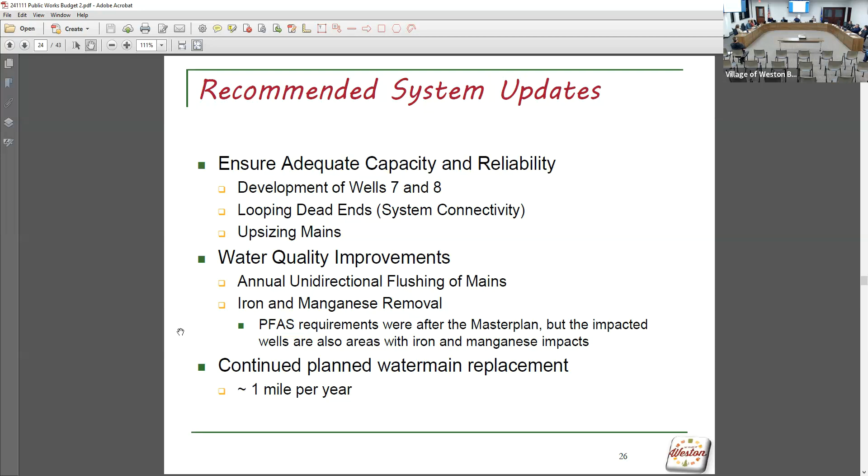We've got a little over 100, I think 110 miles of main, so we're just trying to stay on a somewhat sustainable replacement schedule - about a mile a year. And that intuitively almost gives us a mile of street reconstruction a year too, as we try to keep up with that replacement schedule. This year we got back to our unidirectional flushing.

As Josh mentioned, we had our 2 well rehabs this year, and then our valve and hydrant replacements, just some of that routine stuff. Our capital plan called for 2 new wells, 2 new treatment facilities, a new water tower, and then specified some key water main replacement and looping projects.

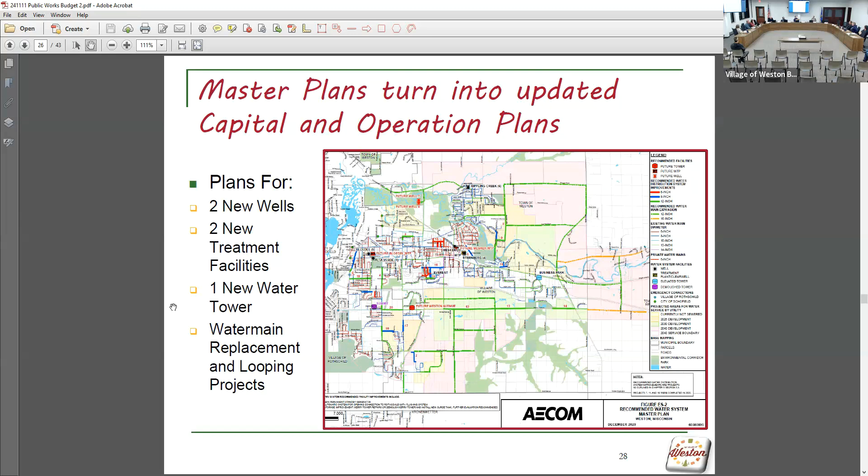And in 2024, we did that. We got the 2 new wells online, we got the PFAS treatment and iron manganese removal work going forward for wells 3 and 4, we replaced 0.4 miles of AC water main from the 1960s, and we closed a half-mile gap on Weston Ave for better reliability and redundancy on the south side of the river, or of the highway.

We kept moving forward with those. Next year, Fuller Street, part of that has an upsize of the water main where we currently show fire flow deficiencies. And then we'll be completing the looping on Weston Ave, and well 4 should be completely up and running with the PFAS removal, and well 3 will be somewhere in the mix of getting it up and running.

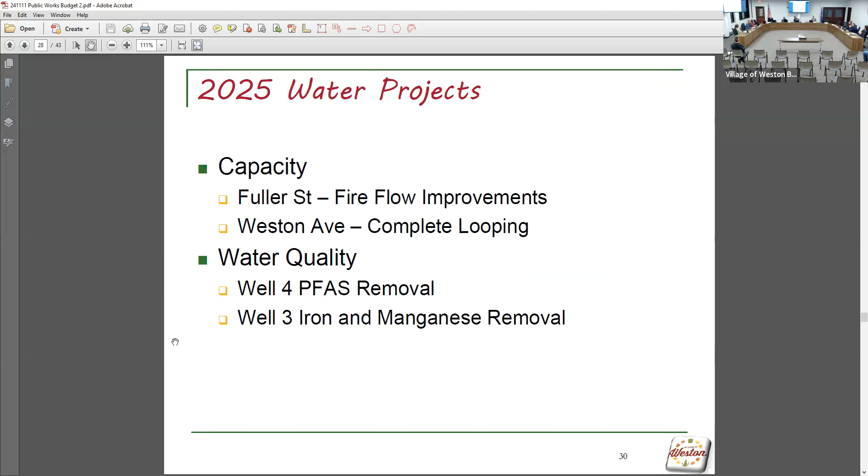So this was kind of that capital plan. I don't know how well you can see my cursor, so I'll just zoom in. So 7 and 8, we had accomplished that.

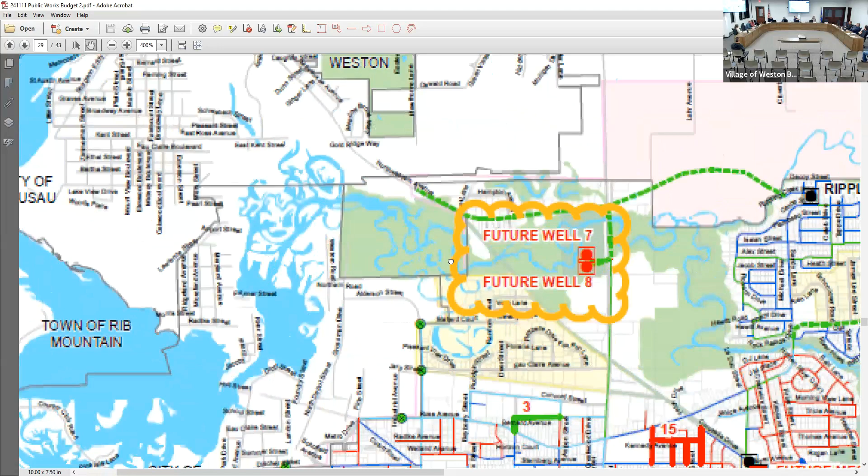Project 18 here was East Jellinek Avenue. Then we got this line through the mobile home park as well, which was also an AC water main from the 60s. This looping project, we have a future water tower site here on Weston Avenue, which someday we'll need to put in. But we were able to get this new water main laid as part of the Weston Avenue project there.

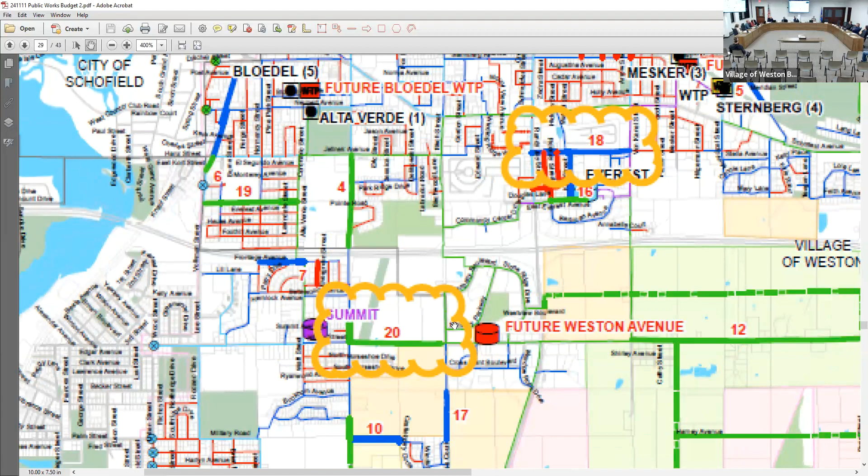So it's part of making sure we have these plans and these models ready to go, so when we have an opportunity for a joint project with Rothschild, the water utility all of a sudden isn't going, oh shoot, should have made that connection then. We're able to kind of proactively plan for that project to take place.

Then this one out here is kind of the cross-country route on Weston Avenue that's taking place. So a lot of these lines we've taken care of. Every year it's another 2-3 bubbles on this map that we're completing.

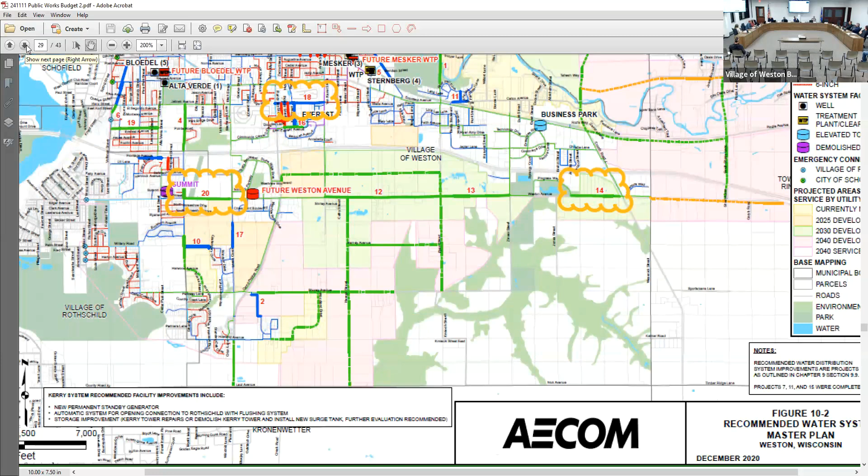We're heading forward. Last year we did implement a simplified rate case, which was an 8%. So we do have a positive net income being projected here.

As mentioned, we've got the PFAS class action lawsuit information submitted. And we'll keep monitoring rates, but I forgot to throw in here, well 4 does have principal forgiveness of 1.3, 1.4 million. And well 3 will likely also have some principal forgiveness on the loan for the emerging contaminants. So the goal is to keep our rates affordable while still improving the quality that we deliver.

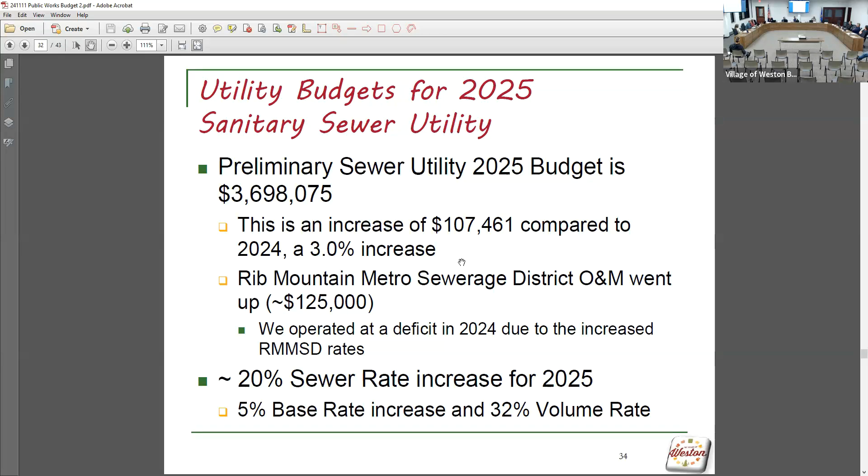Sewer utility, kind of be similar to that last rundown. The main issue there is the rates, keeping up with the Rib Mountain Metro Sewerage District increases. So we do have that 20% sewer rate increase for '25 going into effect this coming year: 5% on the base rate and 32% on the volume.

How are we doing on our suspended solids? Is that the sanitary sewer or the storm water? I'll get there, but sorry. I can jump ahead. Nope, that's okay.

You know, sewer is a little more basic, just routine replacement of sewer main, which when we have a street reconstruction project, either we replace it or we look at lining if possible. So Schofield Ave, we're in the process of getting that televised. We'll either replace the original sewer line there from, I think it was maybe even the late 50s there, or early 60s. If it's still somewhat structurally sound, we could line it without having to dig it up.

And then the full SCADA -- can we get our first camera? It's ordered, it's not here yet. So we're not quite there.

And then, yeah, our SCADA integration -- we've never had all of our lift stations on our SCADA network, so having that here shortly will also help in follow-up from rain events, primarily snow melt, seeing where our infiltration really is hitting us the hardest.

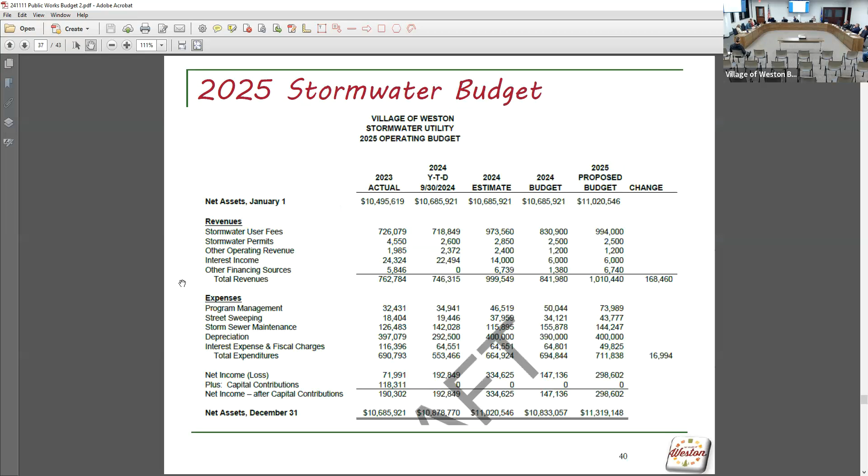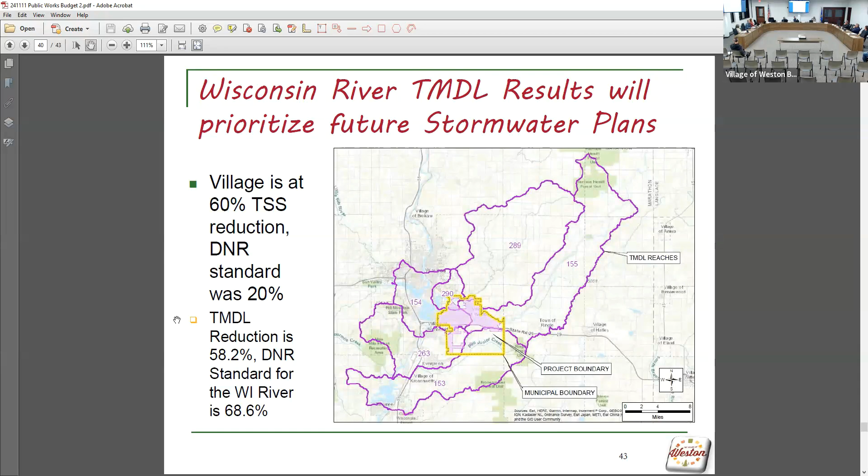So in stormwater, our big issue is the suspended solids, the TMDL, the phosphorus removal. So when it was the suspended solids, we were good -- we were at 60%, we only needed to be at 20. But then the phosphorus issue came to light, and we're now at 58.2 and we need to get to 68. So we're not far off. We're a lot better than most communities, but we still have those projects to get us to DNR compliance.

So we did increase the stormwater rate last fall from $50 to $70 per ERU, which has given us a projected net income here of almost 300,000, which will help us be able to pay off our debt or take on capital projects here, with the main one being the Business 51 storm pond.

I believe we have to get about 140 pounds of phosphorus removal to meet our requirements for that reach, that part of the village that drains the Wisconsin River. This project will get us about 120 pounds of phosphorus removal. So for the most part, not all, but most of what we need to show compliance for that tributary area to the Wisconsin River will be accomplished with that one project.

So we did submit the Clean Water Loan Fund this past October. We'll be looking at getting hopefully about a 20% principal forgiveness on that. And then we also had submitted an urban non-point source stormwater construction grant, which will have some funding behind it as well. So I didn't think we were getting anything on that initially, right? It's not a lot, I think it's about 200,000, but still 200,000.

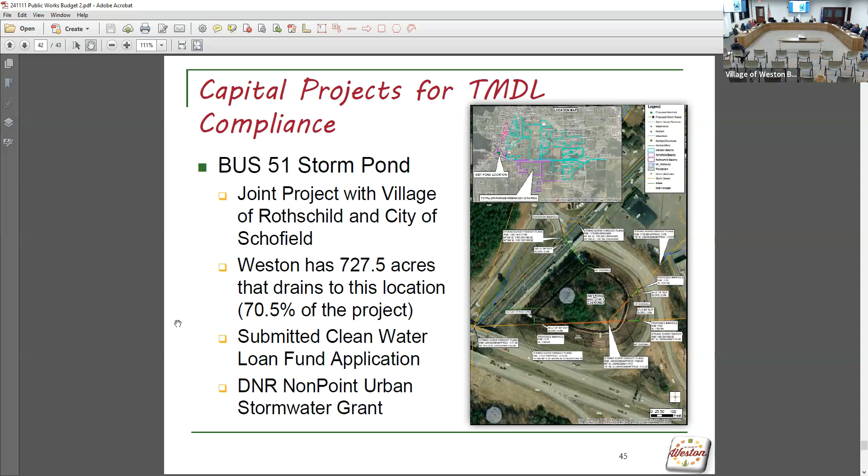I guess I'll try to conclude here. The numbers are always astounding when I think about it, as we get through public works, the water utility, sewer utility, stormwater utility. And it came up earlier, right? The refuse recycling fund, some of those costs that we have as the public works department aren't even necessarily captured just right here. So if we didn't even do a capital project, we still have an annual operating amount of 9.7 million. So whether you guys know it or not, you kind of are overseeing $9.7 million every year outside of any capital projects. So just a take-home point there, that there's a lot that goes on here at the village, and it's not always widely known or understood how much we oversee.

But any questions, I can go back, otherwise I can send this out too. So you have it. How are we doing on the suspended solids since we had the blip in March?

Oh yeah, we haven't had any sewer spikes since then. No, so I don't know what that was. Do you have a pretty good idea, but you can't prove it, and they changed it? I don't know. You don't know, okay. No, we haven't seen it, and I guess maybe when that time of year comes around next year, we'll see if it was a time-of-year type thing. But I know going into next year, I think we want to do some of our own sampling as well, to maybe split Rib Mountain samples, offset it, sample a little bit differently, see if there's maybe somebody putting something in. But then you'd have to blanket the whole system to really check it, and maybe we leave well enough alone. I don't know, it's...